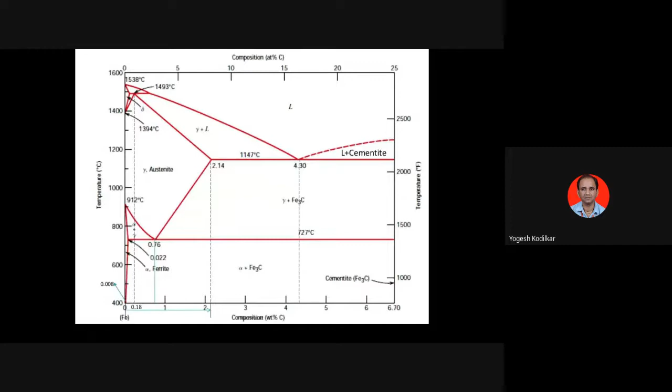No no, one minute. I'm sharing the screen just now, one minute, again.

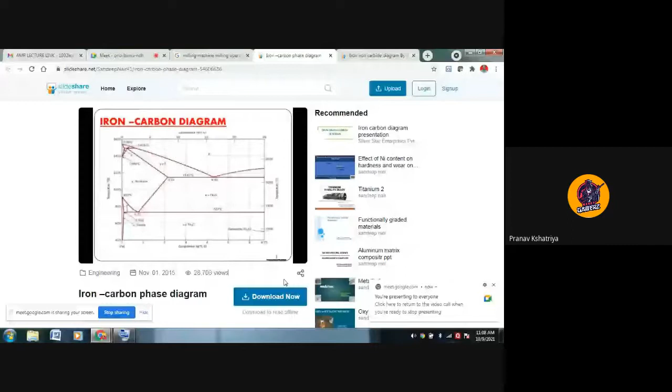Now tell me what you see. Can you see the full name now? Yes sir, Iron Carbon diagram. The diagram is called as Iron Carbon Equilibrium diagram. Okay, so this is your Iron Carbon Equilibrium diagram. Yesterday we studied that this diagram is also called as phase diagram, Iron Carbon Equilibrium diagram, or also called as Iron Carbide diagram - Fe, that is iron, and Fe3C, that is iron carbide.

We call it Cementite further ahead - correct, Iron Carbide diagram. So in this iron carbon diagram, on this x-axis there is a weight percentage of carbon, given in weight percentage.

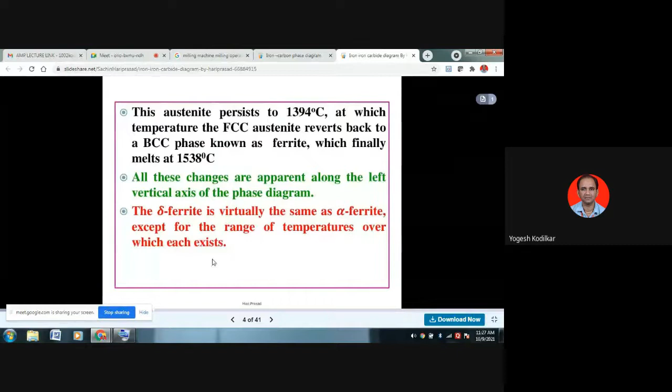Up to 912 degrees, the alpha ferrite phase exists. Beyond 912, the alpha ferrite phase is converted into gamma austenite, and again at 1394 degrees Celsius, that gamma austenite is converted into delta ferrite. The delta ferrite is virtually the same as alpha ferrite, except for the range of temperature over which each exists. Students, alpha ferrite and delta ferrite are virtually the same, only the temperature differs. Alpha ferrite has a body centered cubic crystal structure, and at that higher temperature, delta ferrite is again in the body centered cubic crystal structure. So it is actually the same, only the temperature differs.

So these are the different crystal structures. When you look under the microscope in the practical part, when preparing that sample specimen on the micro machine, we learned in the first chapter that to prepare the sample there are continuous steps: etching, micro finishing, polishing, grinding.

By preparing that sample, you can see such different microstructures, in macro space versus micro. Under that microscope I can see such different microstructures. This is at 90 times magnification. 90x means I have to magnify the structure 90 times. This crystal structure I'm seeing under the microscope, I need to magnify it 90 times so that I can observe this ferrite phase structure.

So these lines are called grain boundaries. What is the line called? They are the grain boundary, and the inner part is the grain. What is inside is the grain, called having different grain sizes, small grain size, bigger grain size. So having different grain boundaries at 90 times magnification is called the ferrite phase.

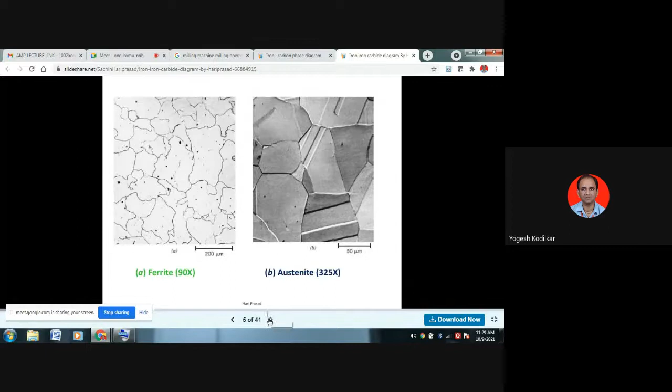But when I have to see this austenite phase, gamma austenite phase, I have to magnify it by 325 times. I have to magnify it 325 times so that there is a phase called the austenite phase. Above that 325 times magnification, I can see this austenite phase at the austenite temperature, and the maximum solubility of carbon.

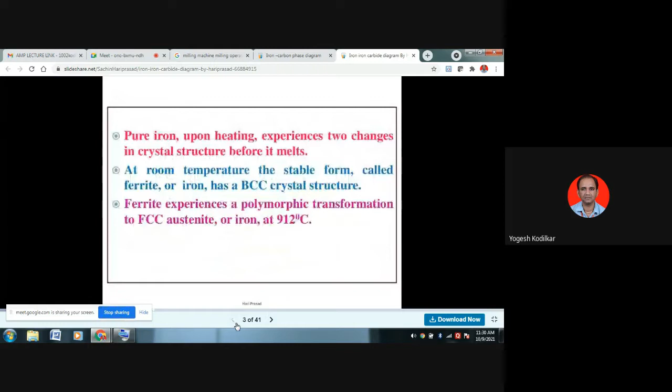In various single phases, gamma iron has 2.1% solubility, delta iron is only 0.1% carbon, and in the ferrite phase it is 0.025%. Alpha iron has 0.008% solubility at room temperature. So at these various phases and structures, for example, the diagram of the alpha ferrite phase has solubility ranging from 0.008 to 0.022. So there is carbon solubility in different phase structures. In gamma austenite it goes up to 2.14. So these are the different carbon solubilities in these various structures.

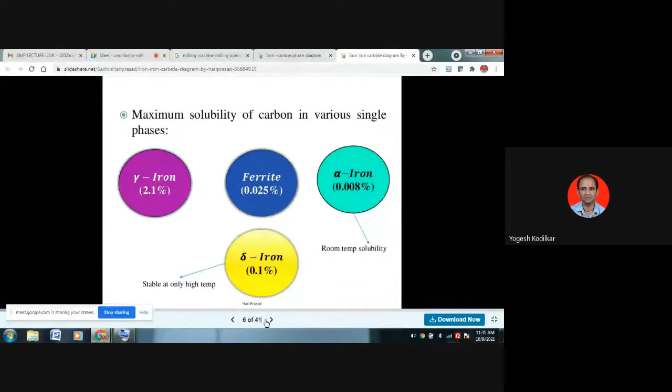In gamma iron it's up to 2.1 percent, while in ferrite it's only 0.025. In alpha ferrite, alpha iron, it's only 0.008 at room temperature, and delta iron is 0.1% carbon. So the solubility of carbon varies in different forms of iron. The carbon solubility changes in different forms of iron. The delta iron has only 0.1% solubility. Maximum solubility is only 0.1%, whereas gamma iron is 2.03% carbon solubility, and alpha iron is only 0.008%. The maximum solubility of carbon in ferrite is 0.025%. These are the different carbon solubilities in different phases, different forms of iron.

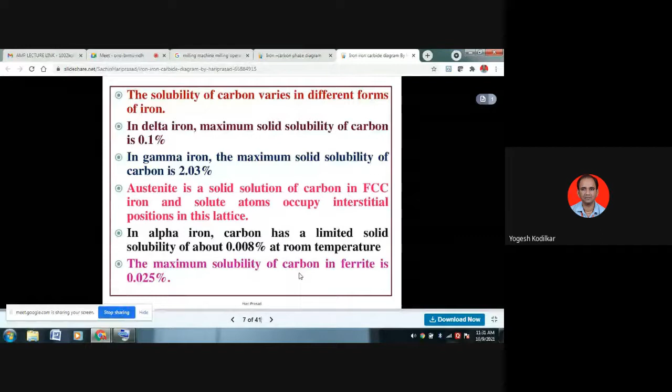Now this is called the iron-carbon or iron-carbide equilibrium diagram or phase diagram. At the upper side, when the carbon percentage increases beyond 4.3, when it goes beyond 4.3, that phase is called the Fe3C phase. This means one carbon atom reacts with three ferrous atoms. That is called Fe3C or the cementite phase. Students, try to understand, beyond that higher carbon percentage of 4.3 percent, one carbon atom reacts with three ferrous atoms forming Fe3C. One molecule of carbon reacts with three ferrous atoms, forming Fe3C, that is the cementite phase. That is the hardest structure of iron, forming the cementite phase called Fe3C, one carbon atom reacting with three ferrous atoms above 4.3% carbon.

From 4 to 6.67%, that is the cementite phase. At above temperature, that cementite is also called ledeburite. L plus cementite phase. These are the different phases.

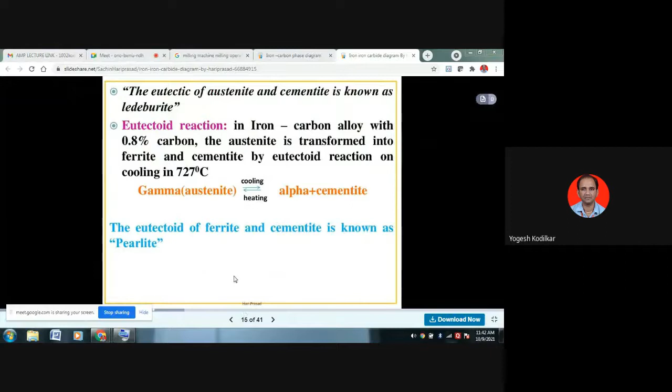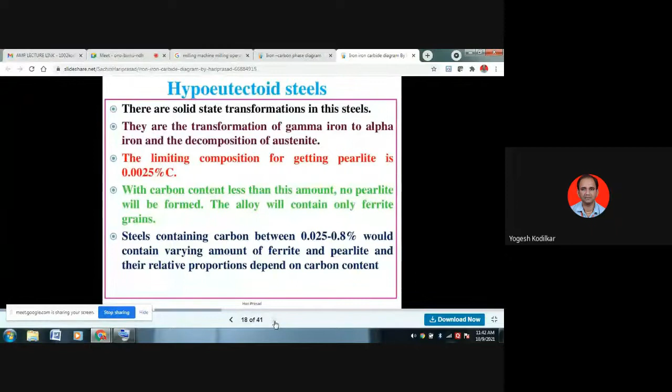The eutectoid of ferrite and cementite is known as the pearlite phase. So for hypoeutectoid steel, left of the eutectoid point is hypoeutectoid and right of the eutectoid is hypereutectoid steel. This is a schematic presentation of hypoeutectoid steel.

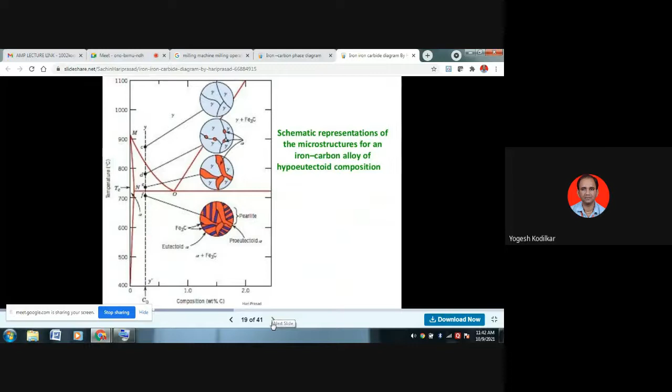Under the microscope, you can see the crystal structures of hypoeutectoid and hypereutectoid steel. This is the micrograph of hypoeutectoid steel. Below the eutectoid point is hypoeutectoid, and above it is hypereutectoid steel.

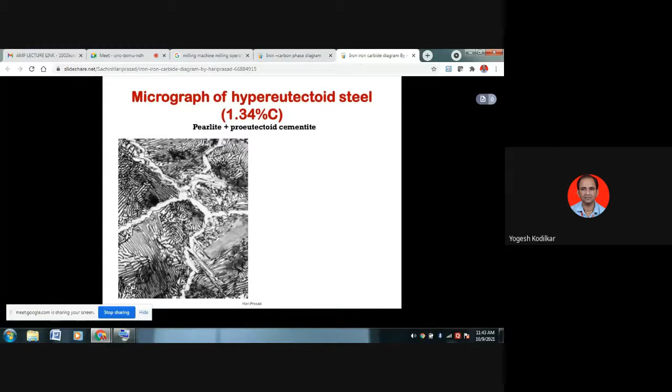Again we will see that in the micrograph. This is called hypereutectoid steel, with more carbon percentage. Above the eutectoid point there is hypereutectoid, and less than the eutectoid point there is hypoeutectoid. So these are the different crystal structures, students, try to understand.

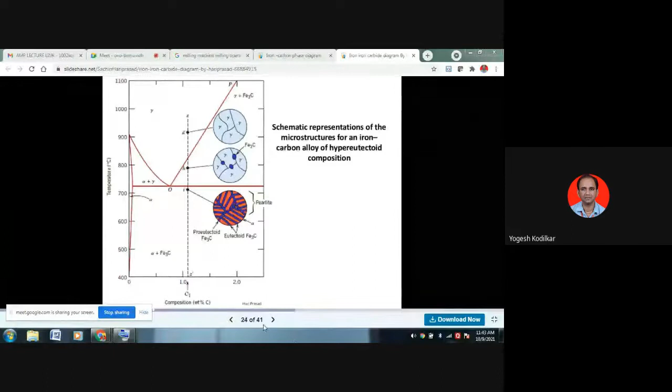So students, today we are concentrating on these three diagrams. Again we will revise that part.

This is the iron carbon phase diagram showing different crystal structures. Initially, there is the alpha ferrite phase at 0.008% carbon. This alpha ferrite phase above 727 degrees Celsius and above 912 degrees Celsius is completely converted into gamma austenite. This alpha ferrite is in BCC structure, and at 912 degrees Celsius it converts into gamma austenite, and around 1490 degrees Celsius.

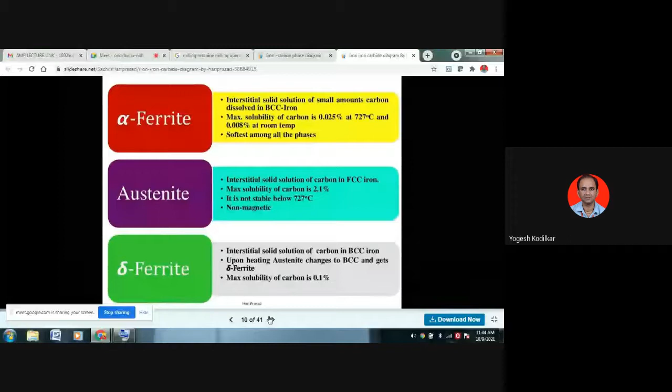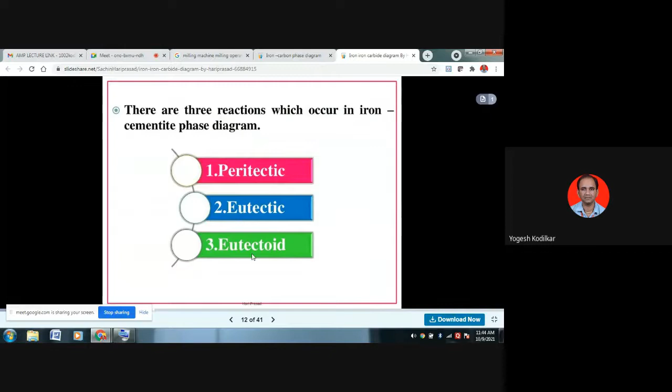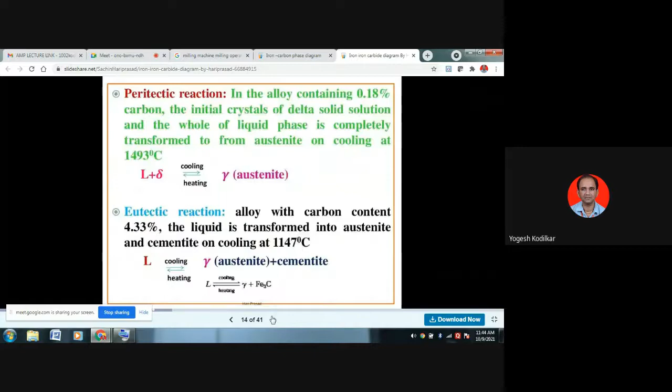We are studying the alpha ferrite phase, austenite phase, delta ferrite phase, cementite phase, ledeburite phase, and pearlite phase. We have also studied the three reactions: peritectic reaction, eutectic reaction, and eutectoid reaction, which we can study under the microscope.

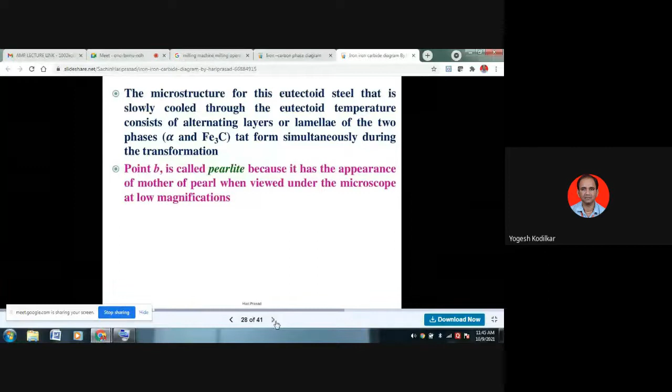So students, in the next part, we will study the different microstructures of hypoeutectoid steel.

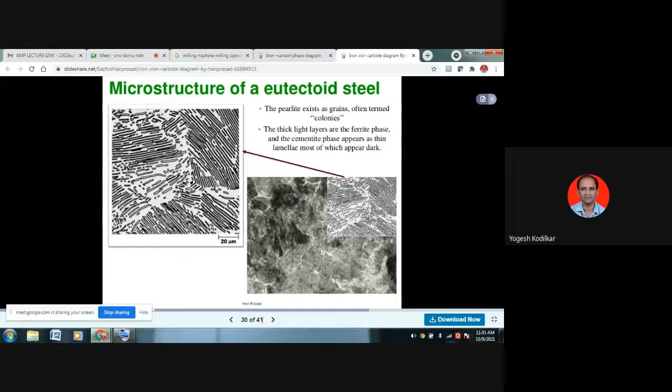So we can see this microstructure under the microscope, called eutectoid steel, hypoeutectoid, or hypereutectoid steel. These are the different microstructures under microscopes.

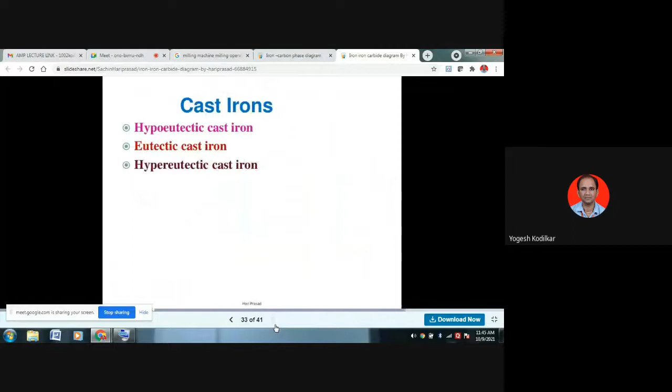And above 2% carbon, it is called cast iron. The remaining part we will see in the next lecture, students.